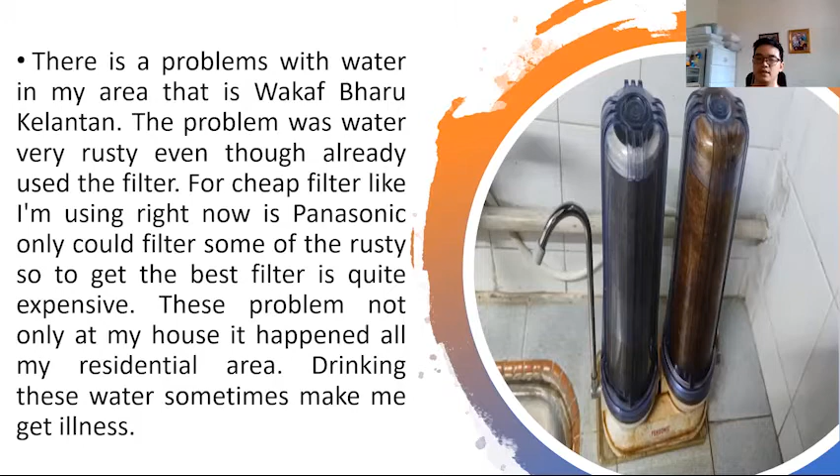Moving on to the problem statement: What is water, how difficult is it to get clean water, and why is it still rusty inside the water even though it's already been filtered? So users will get illness every time, at my tap water house in Kelantan and nearby resident areas.

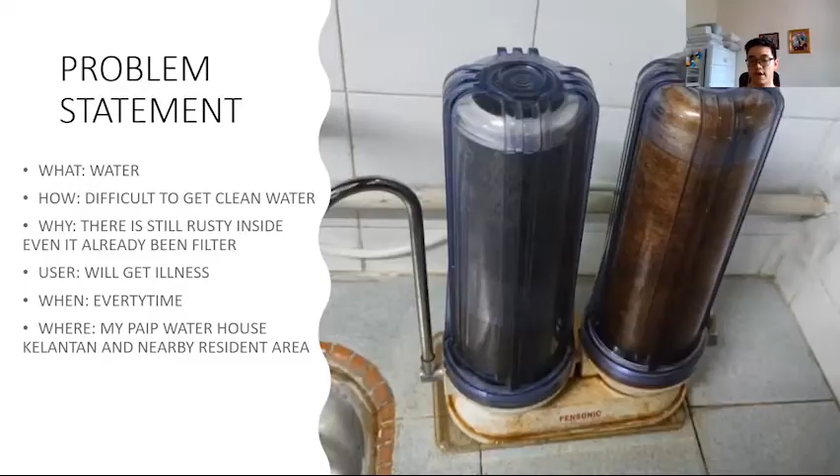Let's move on to task number 2, develop cause and effect chain analysis. As you can see, water tank, iron pipe, leaking, rusty water, and others. These are not the main cause here, so they are crossed out.

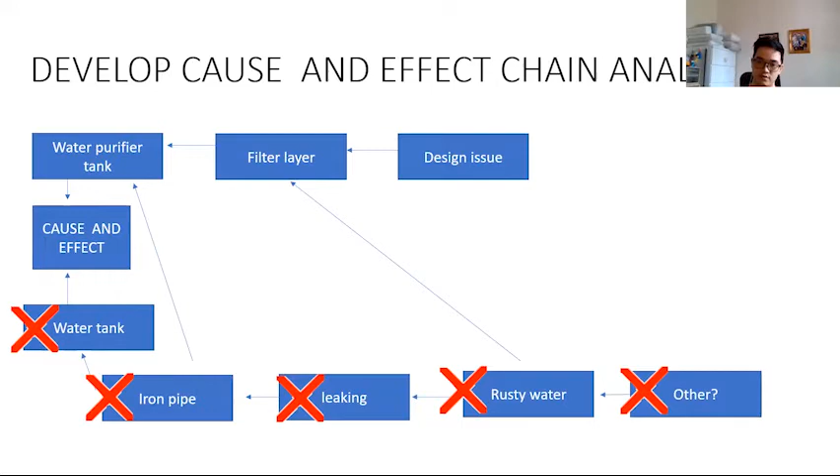The main causes are the water purifier tank, filter layer, and design issue. The function of this water filter is to filter the water and remove harmful chemicals.

Moving on to this slide, the purpose of innovation is to use a 7-layer filter because it's much better than the micron filter type. A micron filter is like a screen door that allows air in and keeps bugs out. The 7-layer filter uses natural materials such as sand, stone, carbon, and others, able to remove rust and dangerous chemicals in the water more efficiently.

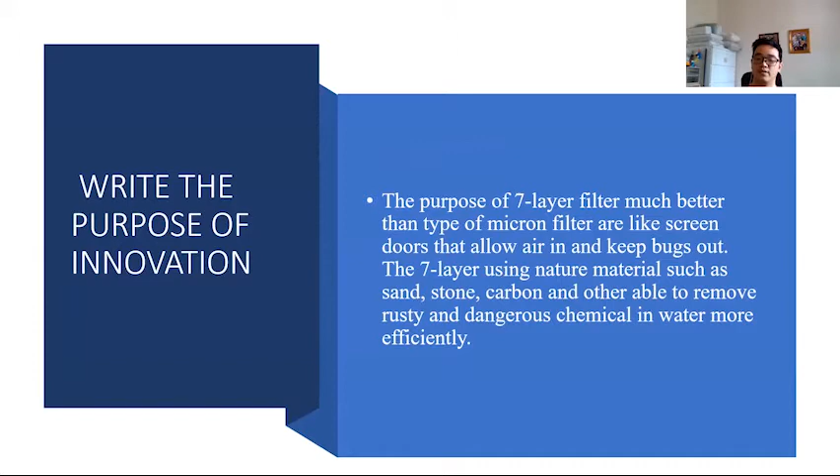Moving on to task number 3, to identify the components, external and internal. The internal components are the carbon filter cartridge, activated carbon, and black O-ring rubber. The external components are the universal faucet adapter, white tube, single diverter, screw, cartridge, plastic frame, stand plastic frame, and tap filter.

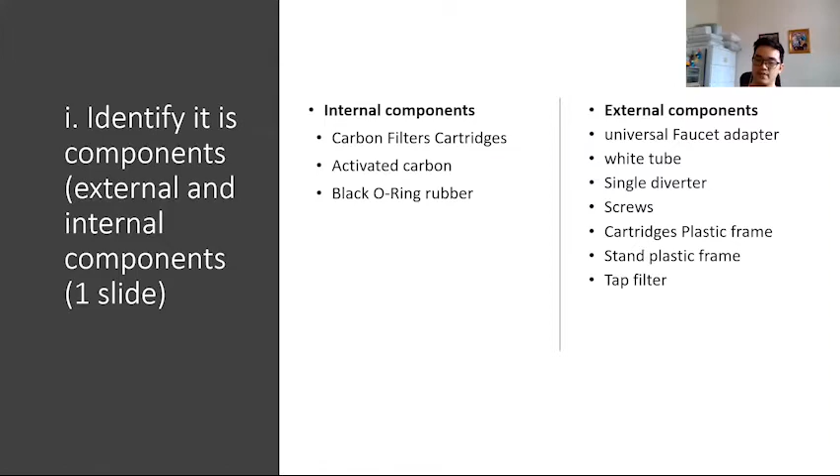For this slide, we identify the interaction between components within the engineering system. Starting from the rusty water, it goes inside the tap faucet set, supported by the flow through the white tube into the body of the filter cartridge plastic frame, supported by the screw, single diverter, and universal faucet adapter.

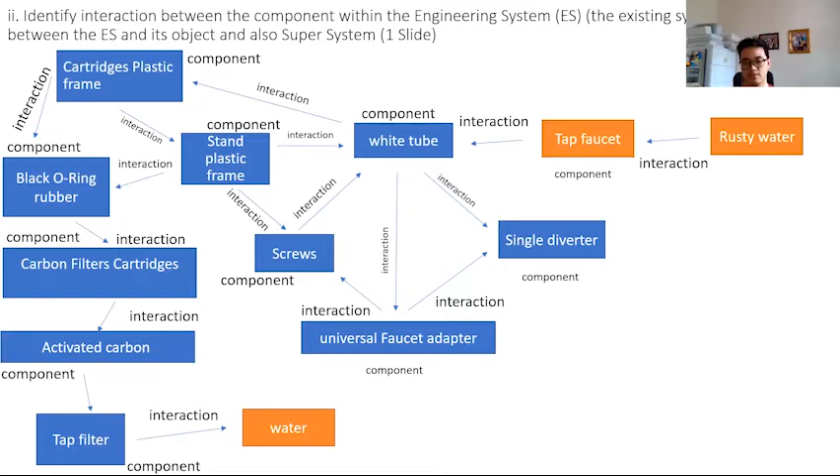It is processed inside the cartridge plastic frame, also supported by the black O-ring rubber. The whole process goes through the carbon filter cartridge with carbon, and finally through the tap filter and releases the water. As mentioned in the previous slide, rusty water is very harmful because it's already rusty.

So it goes to the tap faucet set, supported by the white tube, screw, and single diverter universal faucet adapter. Supported by the stand plastic frame, which is quite useful, and also supported by the cartridge plastic frame, where the whole process starts.

The cartridge is quite useful, holding there, then it goes through the tap filter and releases the water. Okay, that's all for me for this slide.

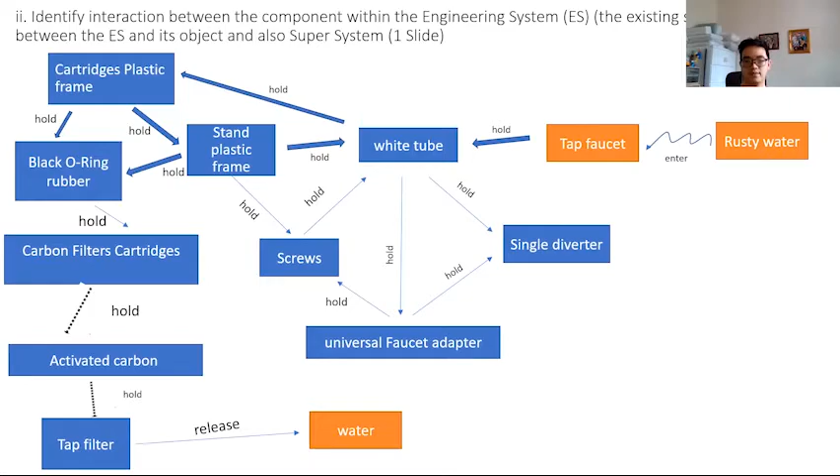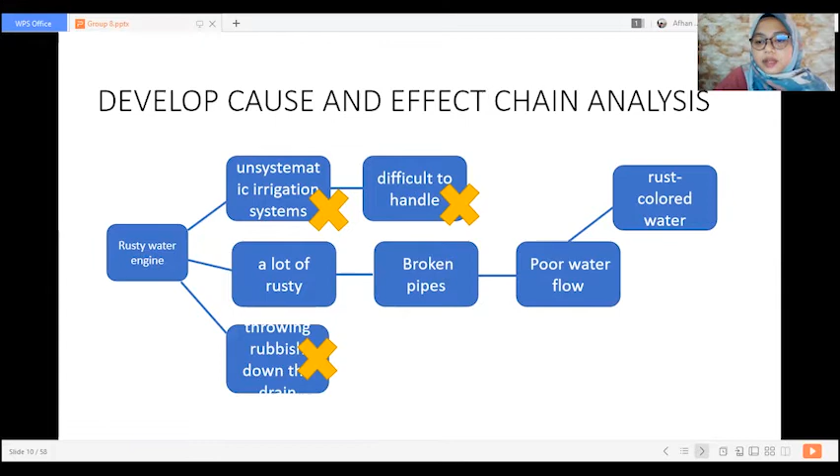Develop cause and effect chain analysis. Rusty water engine, a lot of rust. It is because of broken pipes and poor water flow, which causes rust colored water. Next, the function analysis of the system requires using the engine cover properly so that it does not enter the chamber.

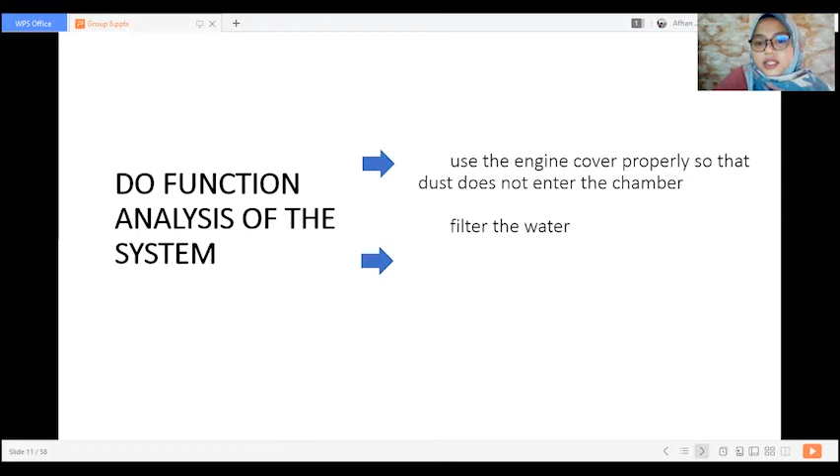Next, filter the water. The purpose of this innovation is to create an effective way to prevent more rusty water engines that can cause water to become dirty and rust-colored. This innovation was carried out on the fan part of the iron engine, which was changed to a stainless steel component.

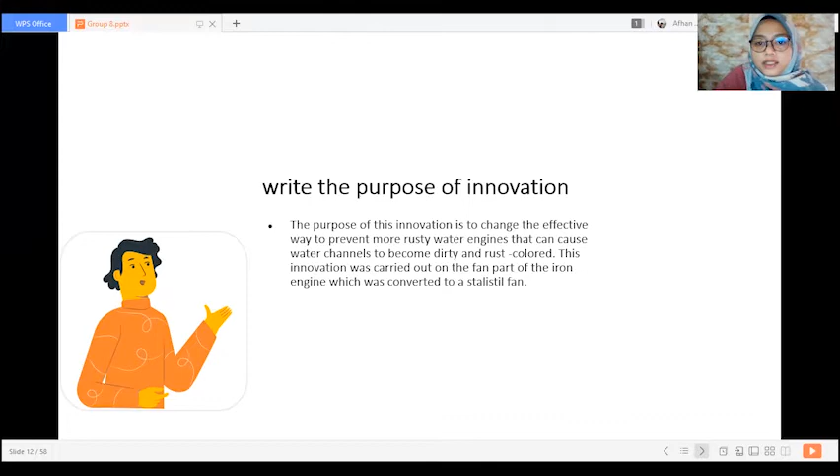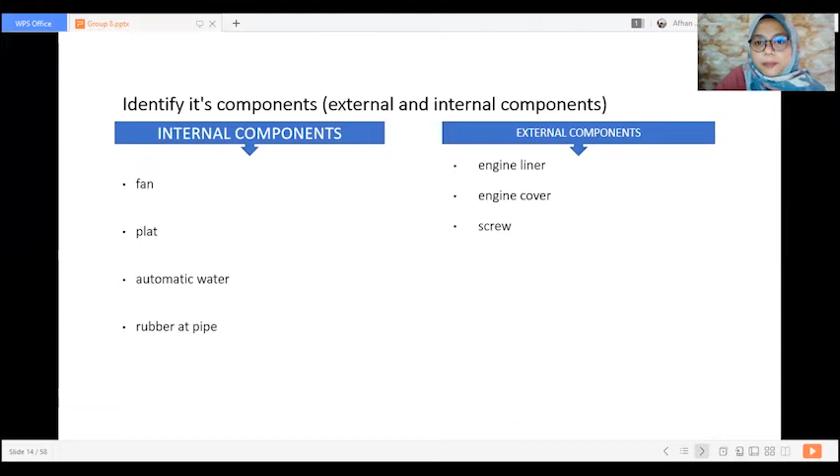Next, testing. Identify the components. There are two: internal component and external component. Internal components are the fan, plat, automatic water valve, and rubber air pipe. External components are engine liner, engine cover, and screw.

Identify the interaction between components within the engineering system. The rubber air pipe is a component that interacts with the automatic water valve. The screw interacts with the automatic water valve. The plat interacts with the automatic water valve. The iron fan interacts with the rubber air pipe, and rusty water interacts with the iron fan.

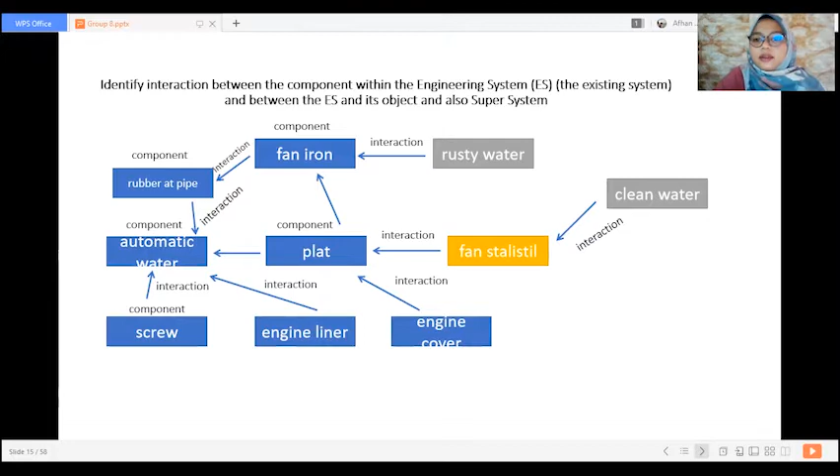The stainless steel fan interacts with the plat, and clean water interacts with the stainless steel fan. The relevant function model: the rubber air pipe holds with automatic water, automatic water holds with screw, engine liner holds with automatic water, plat holds with automatic water, and the stainless steel fan holds with the plat to release clean water. Rusty water enters with the iron fan because the engine is dirty. That's all from me.

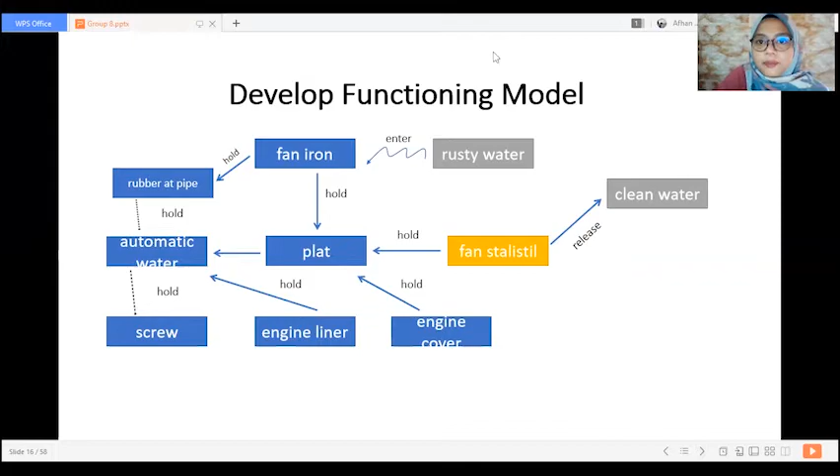Clogged water channels are one of the causes that can lead to water pollution problems. This problem occurs due to several environmental factors such as the use of improper pipe funnels. The width of the pipe stem funnel plays an important role in draining wastewater smoothly. If the use of improper pipe funnels leads to a clogged drainage system, it will indirectly cause problems to users if not curbed as well as possible.

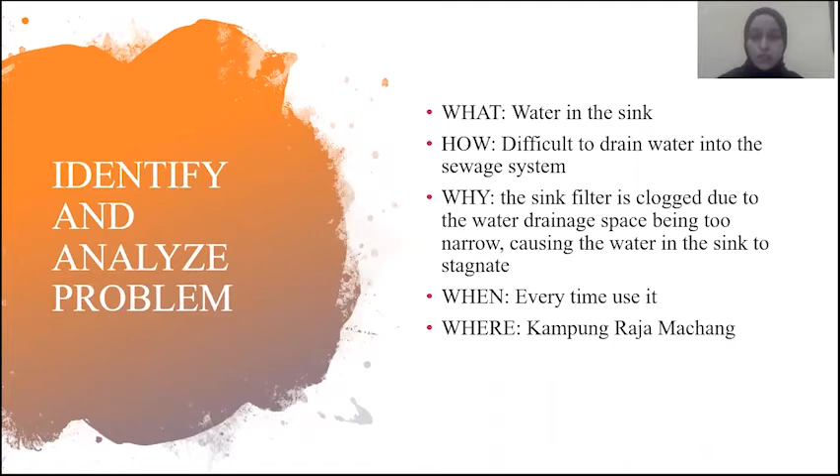This is the problem statement, with 5 questions: what, how, why, when, where. What: water in the sink. How: difficult to drain water into the sewage system. Why: the sink filter is clogged due to the water drainage space being too narrow, causing the water in the sink to stagnate. When: every time it's used. Where: Kampung Raja Machang.

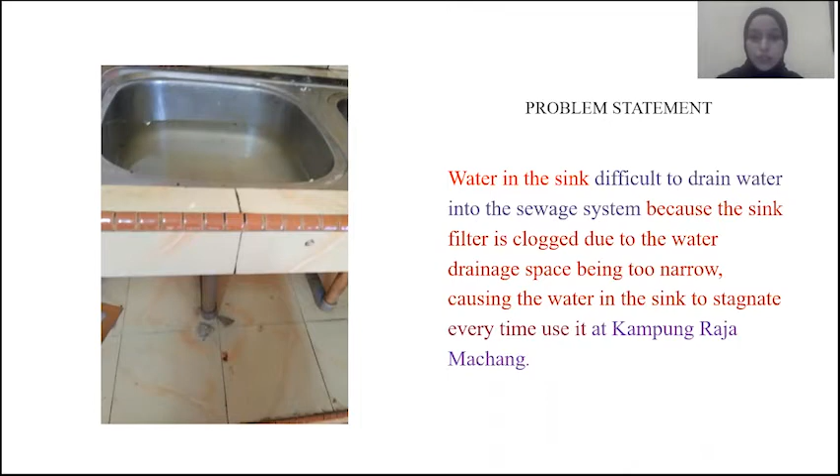Water in the sink is difficult to drain into the sewage system because the sink filter is clogged due to the water drainage space being too narrow, causing the water in the sink to stagnate every time it's used, at Kampung Raja Machang. The root cause of the problem is water difficult to drain into the sewage system.

There are two aspects: system and situation. System: pipe funnel. Why is the pipe funnel space too narrow? The flowing water is not smooth; this is a design issue. Situation: stagnant water. Water in the sink is difficult to drain into the sewage system; this is a cover issue. Corrective action: design a system to make a larger pipeline funnel space that functions to drain water into the sewage system smoothly.

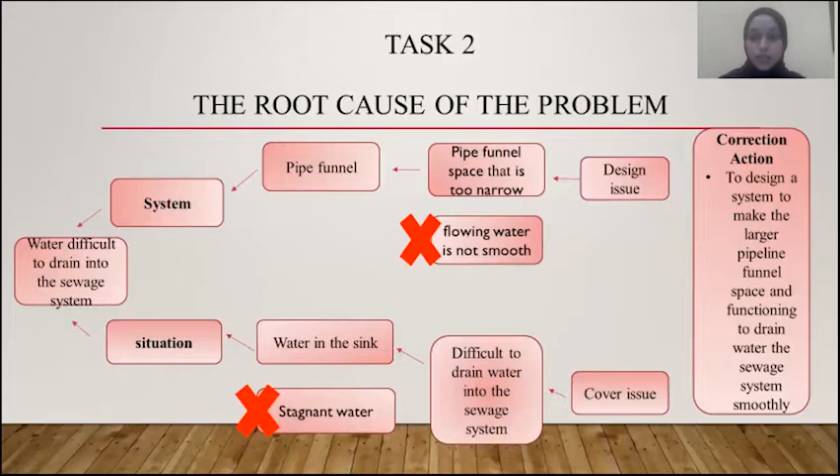Okay, the function of the system.

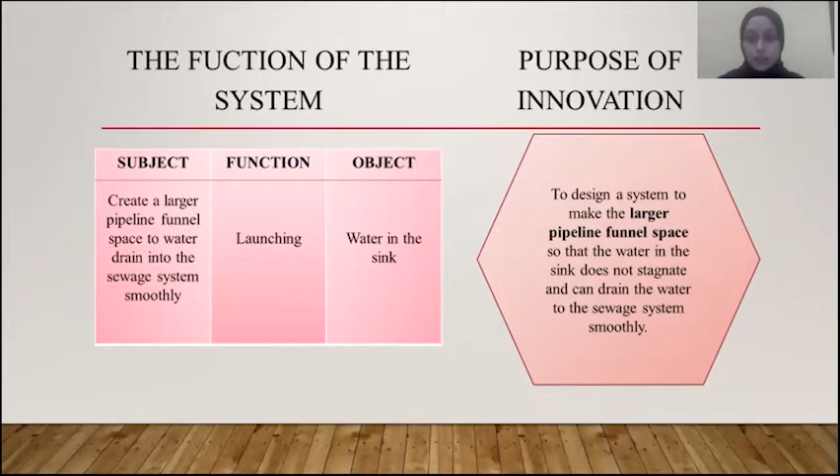Subject: create a large pipeline funnel space for water to drain into the sewage system smoothly. Function: launching object water in the sink. Purpose of innovation: to design a system to make a larger pipeline funnel space so that the water in the sink does not stagnate and can drain to the sewage system smoothly.

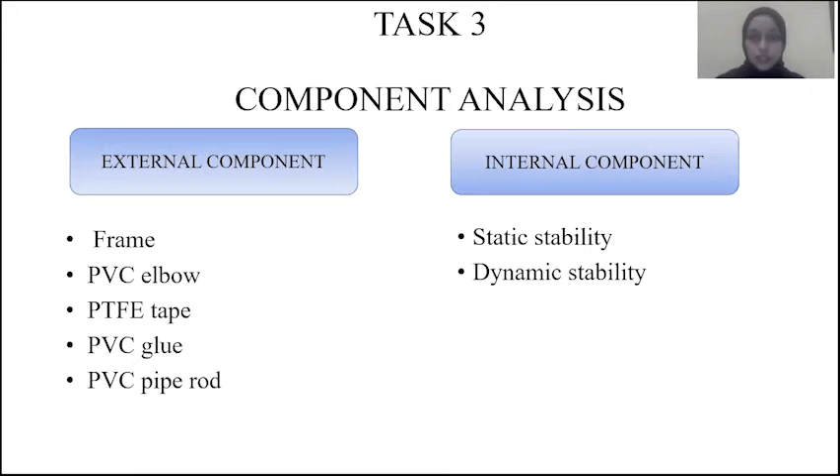This is the component analysis. There are two external components and internal components. External components: frame, PVC elbow, PTFE tape, PVC glue, PVC pipe rod. Internal components: static stability and dynamic stability.

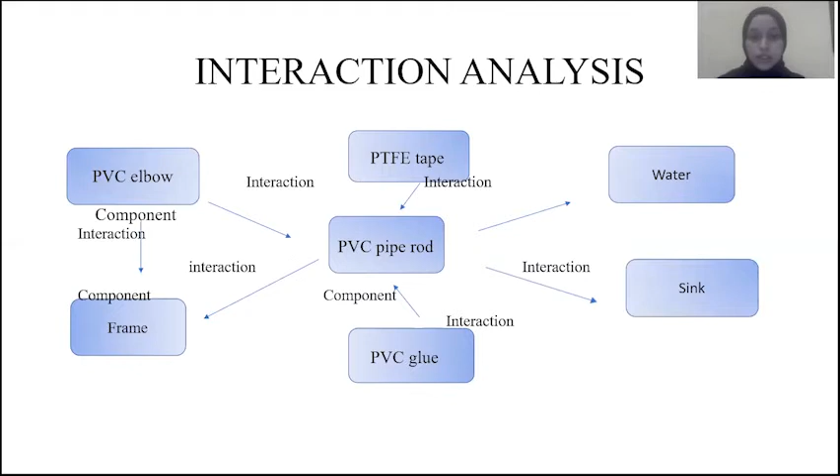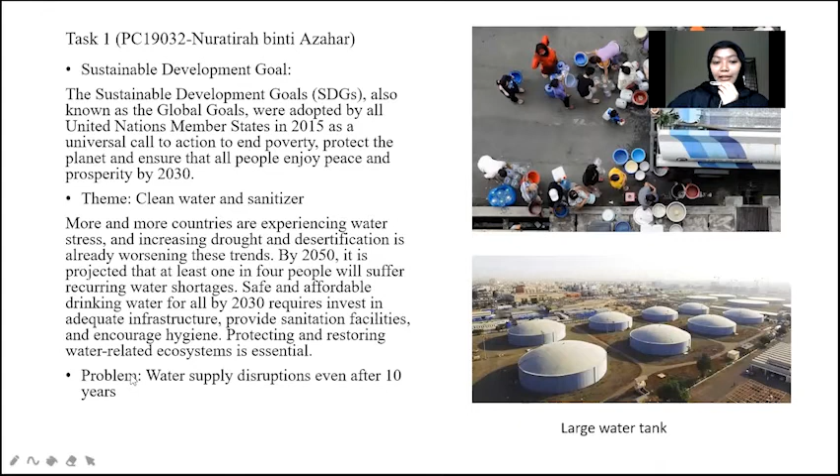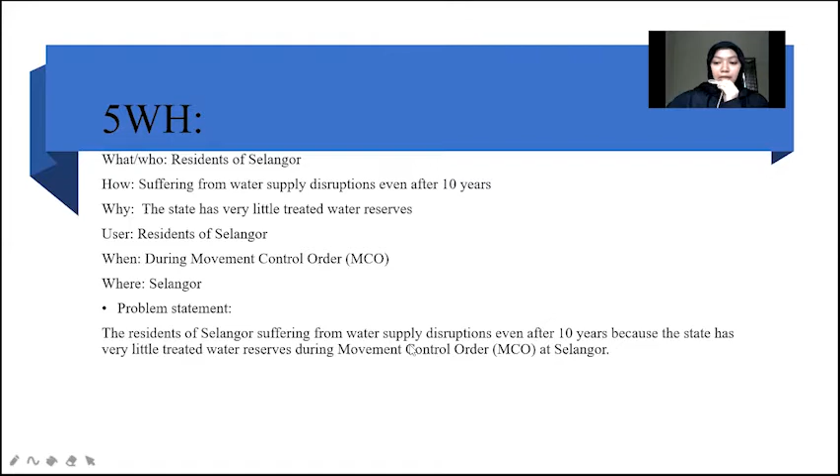My problem is water supply disruption even after 10 years. I used 5W1H: Who - residents of Selangor. How - suffering from water supply disruption even after 10 years. Why - because the state has very little treated water reserve. Users are residents of Selangor. When - during the Movement Control Order (MCO). Where - Selangor. So my problem statement is: the residents of Selangor are suffering from water supply disruption even after 10 years because the state has very little treated water reserve, during MCO in Selangor.

My task 2 is to develop a cause and effect chain analysis to identify the root cause of the water supply disruption. It can be caused by system or situation. The situation might be caused by burst pipe, sudden increase in water demand, damaged water treatment plant, or someone tainting the water supply. But the main cause was the system, because the state has very little treated water reserve. This is due to Selangor's water demand being high, not because the state gave licenses to private companies to do all water supplying work, or emergencies such as droughts or burst pipes.

Selangor's water demand is high because of a few causes: development of Selangor is happening at a rapid rate, the water supply and distribution system had been badly upgraded, and Selangor used up more water compared to the national average.

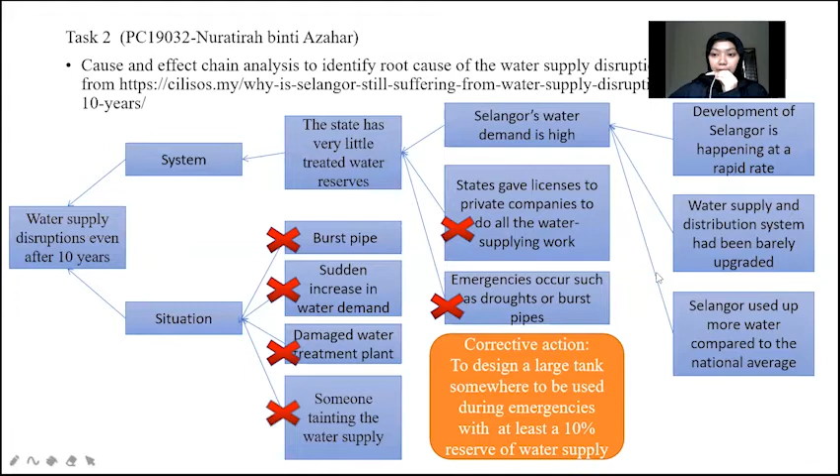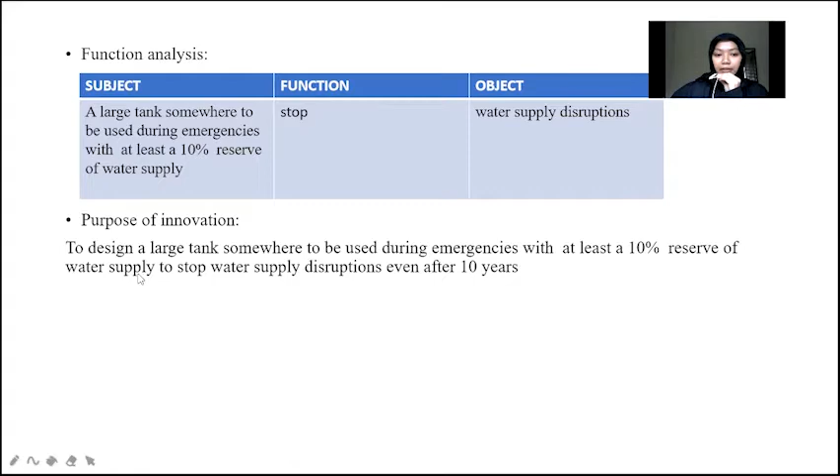My corrective action is to design a large tank somewhere to be used during emergencies, with at least a 10% reserve of water supply. So I developed a function analysis: the subject is a large tank somewhere to be used during emergency with at least a 10% reserve of water supply. The function is to stop, and the object is water supply disruption. So my purpose of innovation is to design a large tank somewhere to be used during emergencies with at least a 10% reserve of water supply, to stop water supply disruption even after 10 years.

My task 3 consists of external components and internal components. For the external component, we have water pipelines, water taps, treatment plant, water resources, reservoir, and tank. For the internal component, I have water, flood, weather, and river.

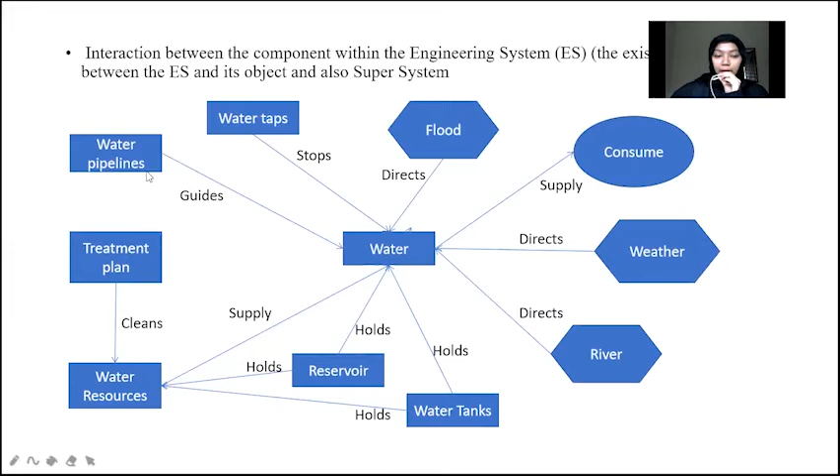The interaction between the components within the engineering system, and between the engineering system and its object and super system: water and flood will direct water. Water, weather, and river will direct water. The water tank will hold water while being held by water resources. Reservoir will hold water while being held by water resources. Water resources will supply water while being cleansed by the treatment plant. The water pipeline will guide water, and the water tap will stop water.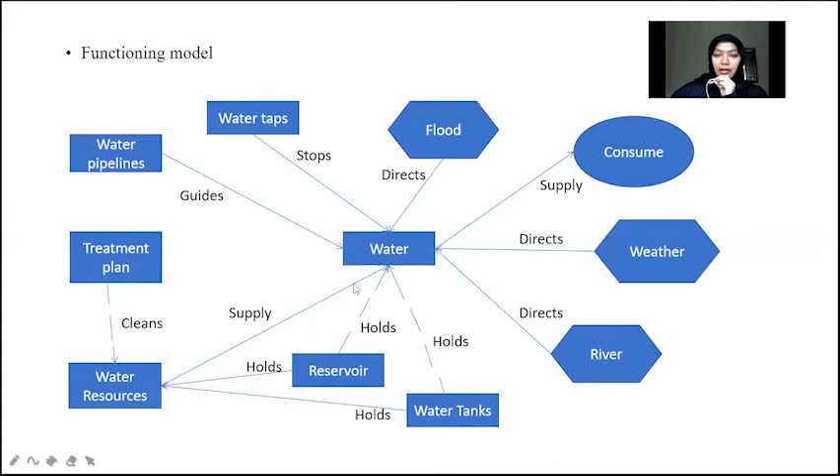Today I will be talking about task 1. I have selected the theme clean water and sanitation, and it's about intro to sustainable development. Sustainable development goals are the blueprint to achieve a better and more sustainable future for all. They address the global challenges we face, including poverty, inequality, climate change, environmental degradation, peace, and justice.

Then I found a problem issue in my family home in Kelantan. There is a problem with the tap faucet or faucet pipe, and it happens every 6 months in my house. In the faucet there is an object and the faucet is damaged or broken. The ground always shows water coming up near the faucet.

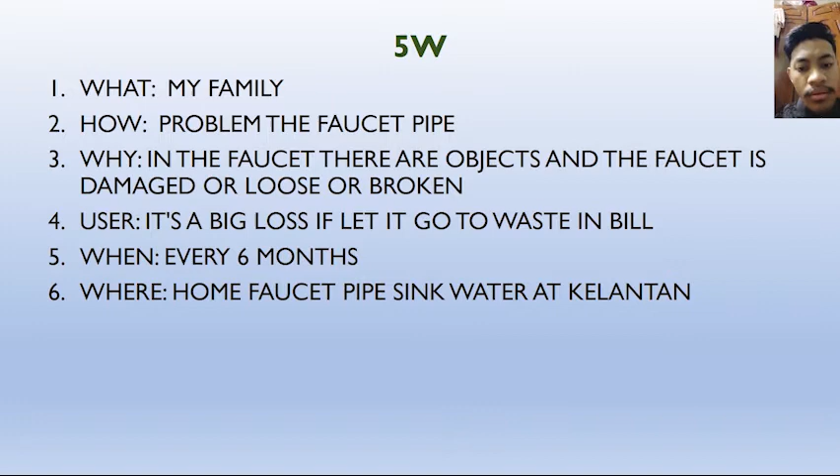Task 2: cause and effect chain analysis.

For the cause and effect analysis, the problem with the faucet pipe system is a rusty pipe faucet causing damage from inside. Then the water doesn't stop coming out, causing waste in water bills. The pipe head is loose, so water pressure comes out fast.

There are a few possible effects and causes, like leaking, clogging, and the situation of holding the faucet too tight, or always closing the pipes not tightly, leading to frequent water usage.

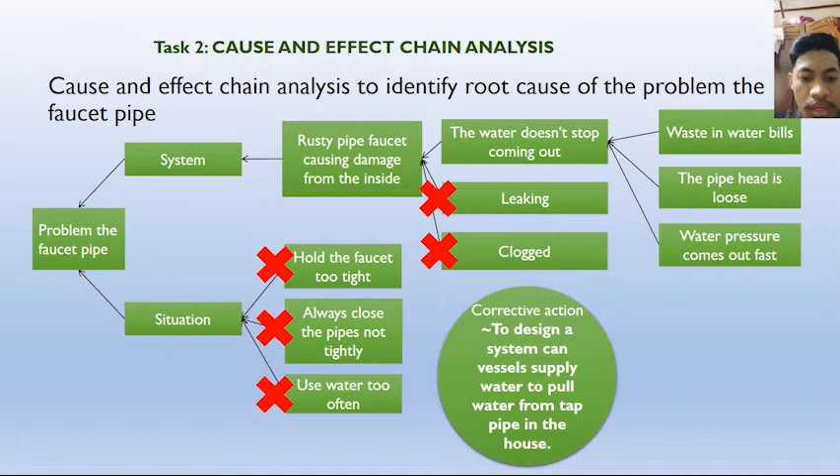And I found a corrective action: to design a system, a vessel that can supply water to pull water from the tap pipe in the house.

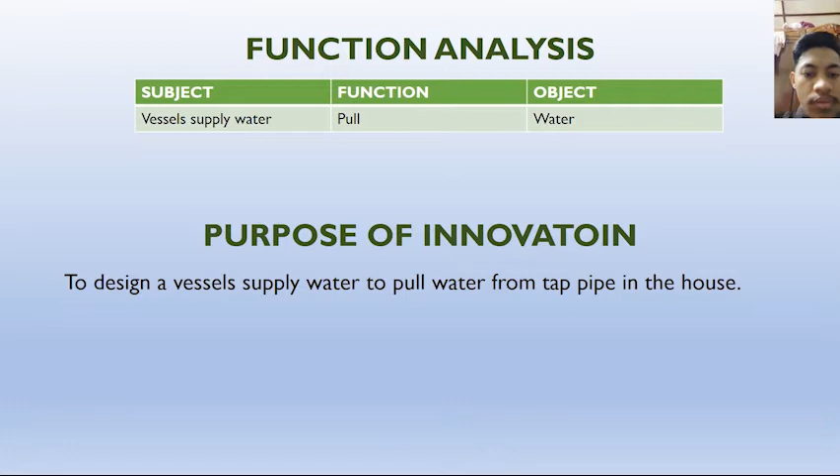Next, function analysis. The subject is the vessel supply water, function is to pull, object is water. Purpose of the innovation is to design a vessel that supplies water to pull water from the tap pipe in the house. Next, here is task 3.

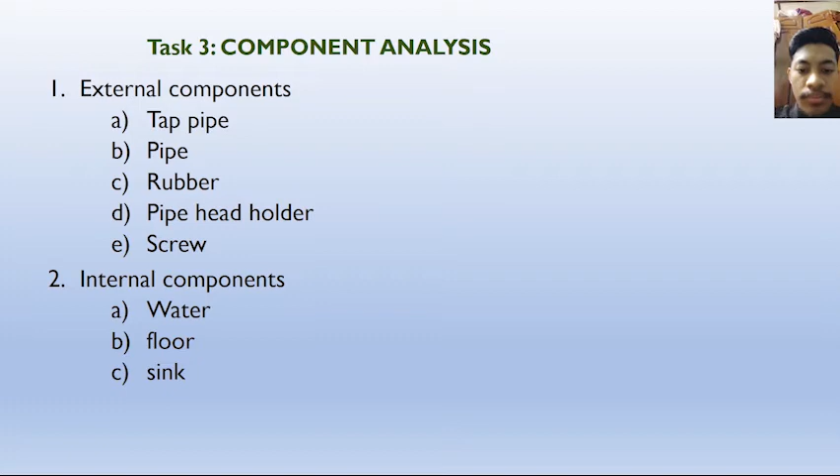Task 3 is about component analysis, covering external and internal components. External components are: tap pipe, pipe, rubber, pipe head holder, and screw. Internal components I found are: water, floor, and sink.

Next is the interaction between components with the engineering system. Here is the interaction analysis: water is a component interacting with the tap pipe component, interacting with floor, sink, screw, pipe head holder, pipe, and so on.

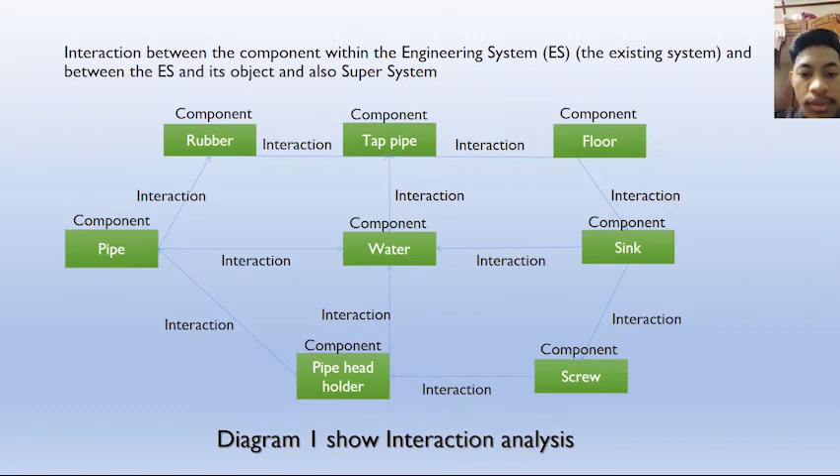This is the functional model. The function of water is: stop - tap pipe stops water, and pipe head holder stops water; direct to sink; hold - screw holds pipe holder, holds pipe, and so on.

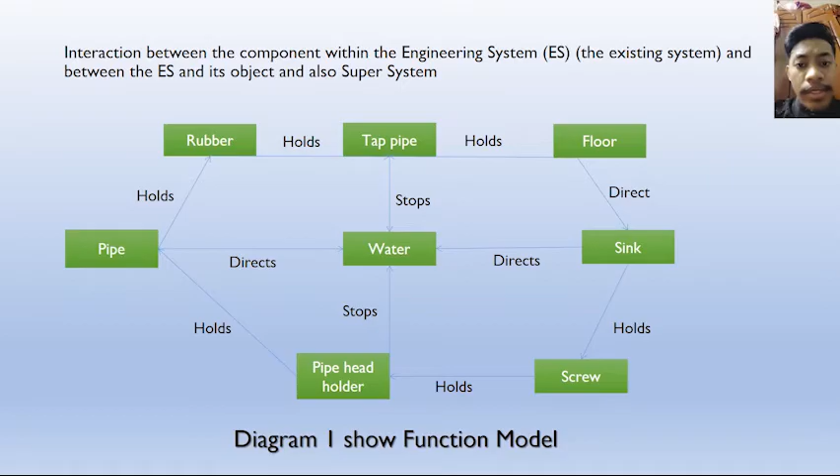Today I will go with my task 1, introduction. Our theme is clean water and sanitation. Sustainable development for clean water and sanitation is one of the SDG goals, in line with the will of the government to end poverty and ensure all people enjoy peace and prosperity by 2030.

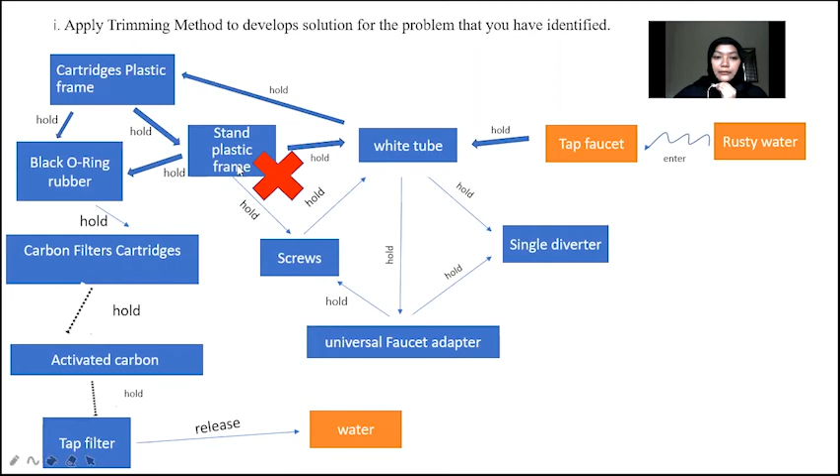From this trimming method, we identify that the stand plastic frame needs to be removed. We sketched the ideas for our solution to remove the plastic frame, and the system will look like this without the plastic frame. That's all for task 4.

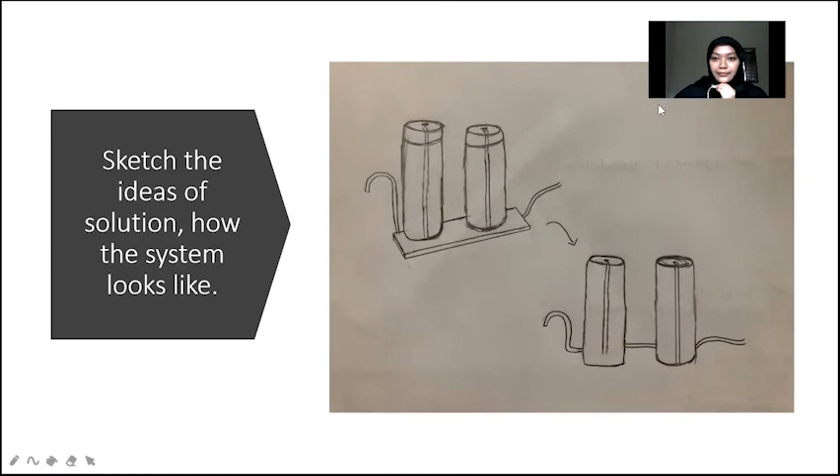Hi, we will proceed with task 5 for our group.

Engineering contradiction method, inventive problem. The rusty water comes out from the water supply at home, and the manipulated variable is increased density of carbon inside the filter cartridge. The positive variable is that carbon is able to increase the stability of the object. System parameter 13: stability of the object's composition. The negative variable is that the process of filtering speed will be decreased.

For the last one, the engineering contradiction: if the density of carbon inside the filter cartridges increases, then it can block rusty water as a positive impact, but it needs to wait longer to get clean water as the negative impact.

The next one is the inventive principle. For the improving parameter, we use parameter 13, stability, and the worsening parameter is 9, speed. For the principles, we use principle 1, segmentation; principle 2, taking out; principle 26, copying; and principle 28, mechanic substitution.

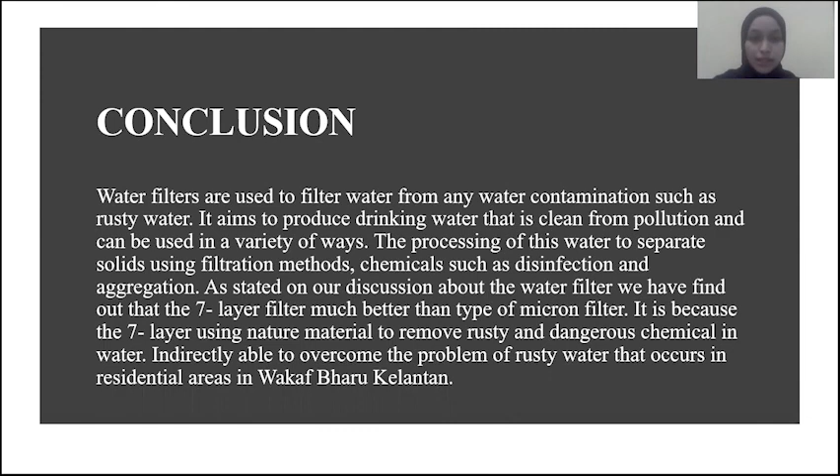As stated in our discussion about the water filter, we found that the 7-layer filter is much better than the micron type filter. This is because the 7-layer filter uses natural material to remove rust and dangerous chemicals in water, indirectly able to overcome the problem of rusty water that occurs in the residential area in Wakaf Bharu, Kelantan. Okay, that's all from our group.